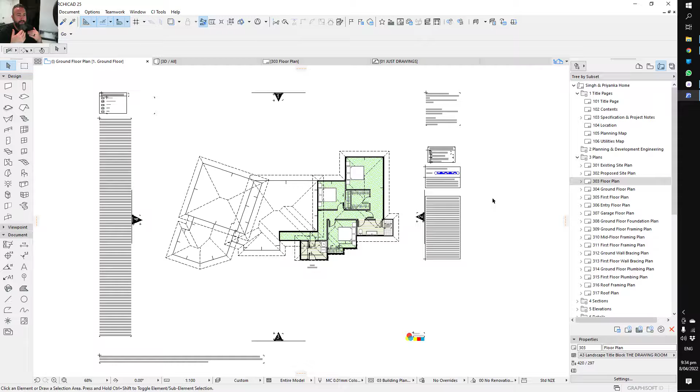So this is where we're at. Here's the site, I've pulled the garage right forward. Now it's not a 3 metre setback up there, it's 1.5, because that's a privately owned right of way. So 7 Lily Way is a privately owned right of way, so we can go 1.5. We can also push that back 1.5, or even 3 meters if we wanted to. There'd be no issue there.

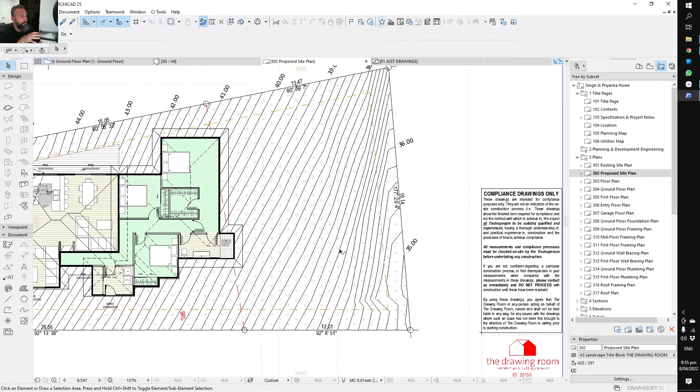And here, because we're on a timber floor now, I'll show you why I've done that in a minute, we're running through over the BRL, but of course we've got the cantilever for the timber floor, so we're not going to have any piles on the other side of the BRL. Even if we did have piles on the other side, I happen to know that this here is actually pretty good ground, because of plots I've done up here, so it's not really an issue.

Alright, so first of all, meterage. You'll notice the square meterage, I'm at 205.05, and the original was 205.5.

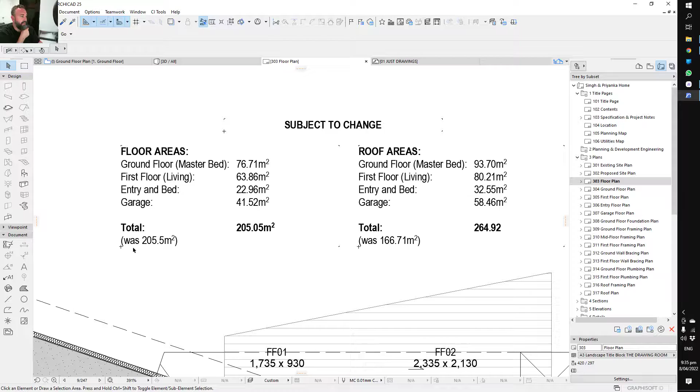All of the areas and spaces, all the key spaces, the living spaces, the bedrooms and all that kind of stuff are the same or very similar to what was in Steve's plans, so the customer shouldn't have any feeling like they're losing anything. They should feel like everything is the same.

That's my plan. I intend to make this 205.5, so I'll find that 0.45 square meters as I go along and develop it a little bit more. You'll see the extra development I need to do later on.

I also haven't put any staircases in at this point, just in case we need to make changes. A staircase takes 20 minutes to half an hour to do properly, and because there's 3 of them in here, that's an hour to an hour and a half worth of work. Then if someone says I want to change that, I don't want to have to redo it, so that's why that's not in there at this point.

So the idea is the garage is at the top at 47 meters above sea level, and then you come in there. To get out of the garage you'll go down a garage door. You can't see it because I've got it on the wrong layer, but out of a garage door here, down here, and there's a landing here. Then below there, about 600 mils lower, is the entrance. So you'll come in here to the entrance, bedroom, bathroom, and then down these steps.

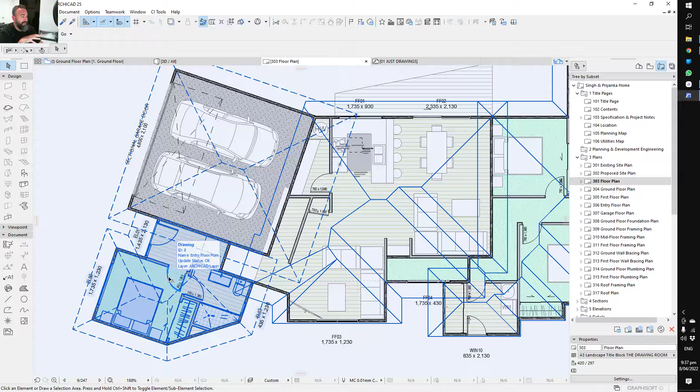Now I wasn't sure about this bathroom, whether or not we want the door coming off there, I can do that, just let me know, or off there as an ensuite. I actually thought it looked really nice as an ensuite, and I figure they're probably going to put their parents in there. I'm assuming when the parents come from India, that's where they're going to go, but you guys know the customers, so I'll leave that to you to discuss with them.

So down the staircase, family room. The family room was downstairs in here, I've moved it up to here, and I think that fills that space really nicely. Obviously there'll be stairs there and stairs there, so you'll just have to imagine those for now. Pantry, hot water cylinder, kitchen, dining, living area.

Down the stairs down here, this drops about 1 meter, I think, from memory, between this floor level and this floor level. Then you've got your laundry, so that's probably the one main change I've made, they've got a separate laundry now that wasn't there. And then you come around, and obviously you've got your 2 kids' bedrooms and your master bedroom with your Dutch ensuite and a big walk-in wardrobe.

So the roof area has gone from 166, Shane, from 166 square meters to 264 square meters. There's not a whole lot I can do about that, but I believe I've saved you quite a bit of money in the foundations, so hopefully it all works itself out for you.

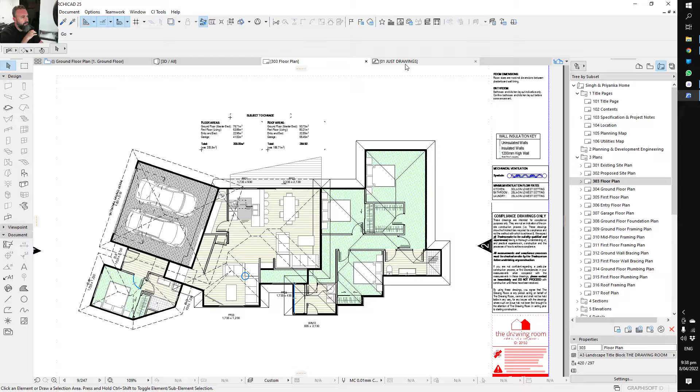When you have a look at the site plan, you'll see how stretched out the house is, and I'll show you in a minute how tight it is on the daylighting. So you can just see there was no way that other house was going to fit on here, it's just physically impossible, which you already know.

And so we've basically just pulled it all out and separated it out into 4 separate layers. Now it was 5 layers.

I had this master lower again, pulled back, with the deck wrapping around there, because I wanted them to be able to look out and across there, but it just doesn't seem really practical. I could do that, but I'd have to reduce the square meterage, which isn't what we want. Going back to them and saying your house is the same price but smaller would be a pretty hard sell.

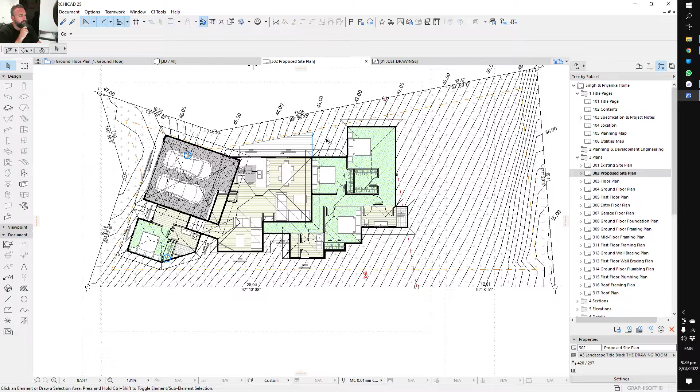So I have to have 12 square meters of outdoor decking area. The rest of that 50 can be in here, that's no problem. I still have to play around with it a little, but it's about 12 square meters there. As far as the exterior goes, don't pay attention to the roofs.

They're only there at this point to give me reference points. What you see in the silver is not actually a roof, it's where the top of your truss will be. On top of that you still have purlins and roofing iron, and on the edges you still have your barges and gutters to go on. So there'll be more added onto that.

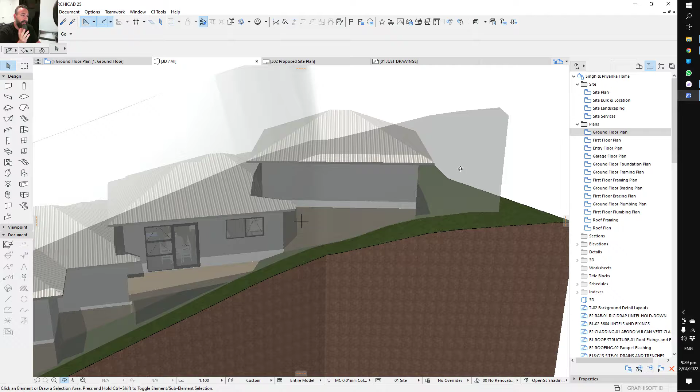Now in Tauranga City, Mark, you might be interested in this. We've got 55 degrees on your north face and 45 degrees on every other face, and nothing on this face. So technically you can't penetrate it with your barges or eaves, but you also aren't governed by any daylighting, which isn't an issue on this site.

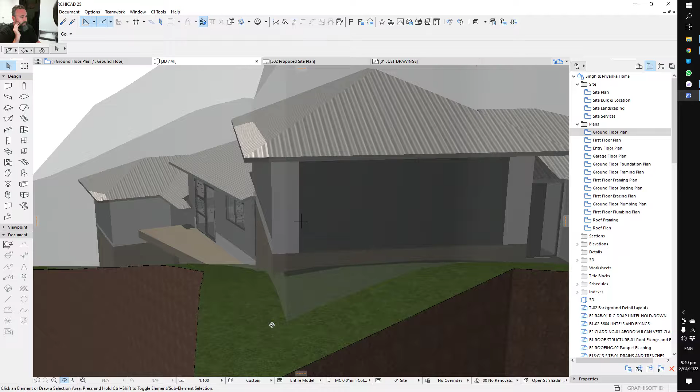In Tauranga City, and it's the only council that does this in the whole country, you're allowed to put your eaves into your setbacks. Most councils get around that by having lesser setbacks, like Auckland for urban areas is 1 meter, but you can't put your gutters or barges into that. Whereas Tauranga City say you can build up to 1.5 to the cladding, and your eaves are allowed to go inside that. It's actually to the gutter, not the eave, so we still have to be pushed back a little, but you can intersect that.

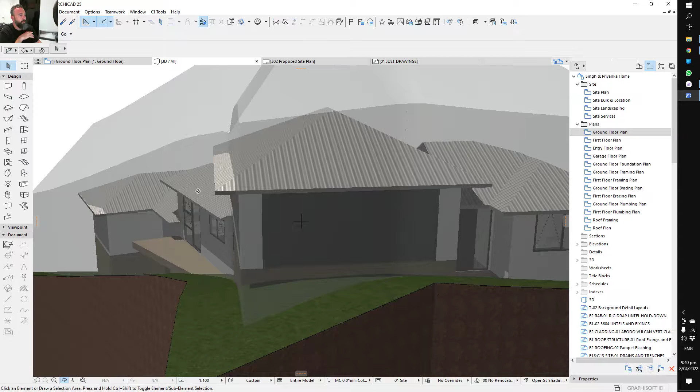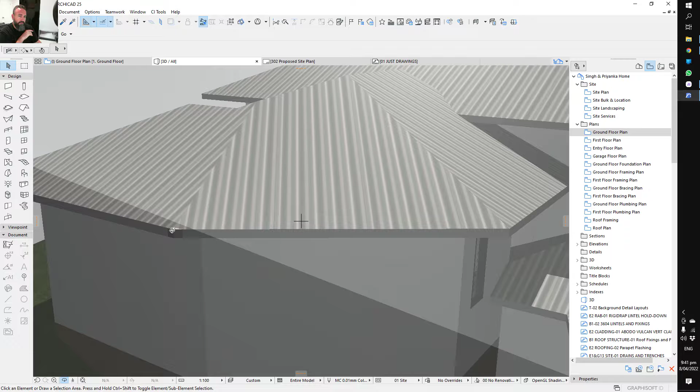What you can't do, which trips a lot of people up, is have this eave - see this line here, because it goes up 2.7 and in 45 you can't have it in there. You can only have it on that side. So that will trip you up. You'll see here it's there, so it's fine. If it was only 150 mils up, you couldn't do it.

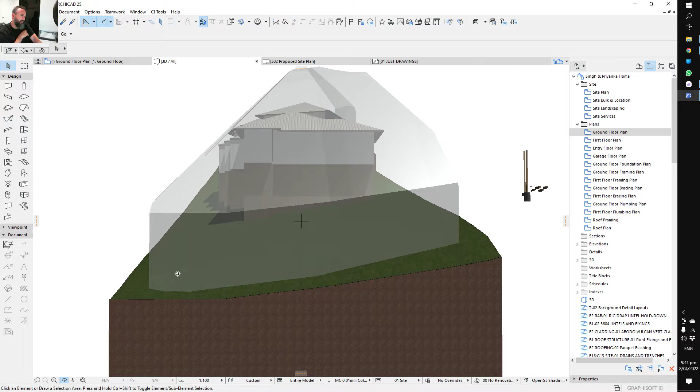And that's obviously when we get down to this area here, it becomes a major issue because these poke through really quickly as you go up the slope. The slope's really difficult, as you're already aware, because not only is this the 55 degrees and this the 45, so this is your slackened slope. The site falls from high to low over here, so it's dramatically increased that issue.

Again, you can see it on the foundation there. So this side drops much steeper than this side does. If you're wondering how tight I am, you can see there how close those are to that line there.

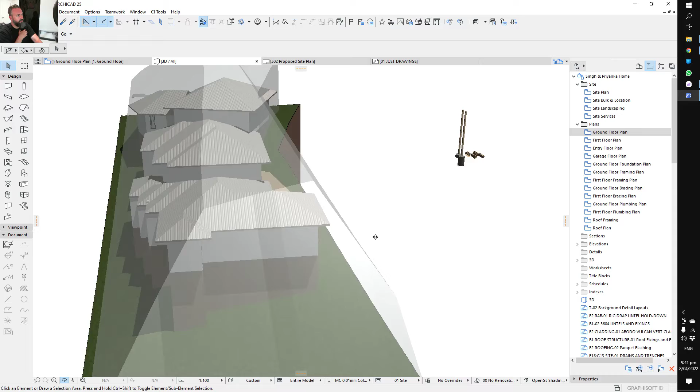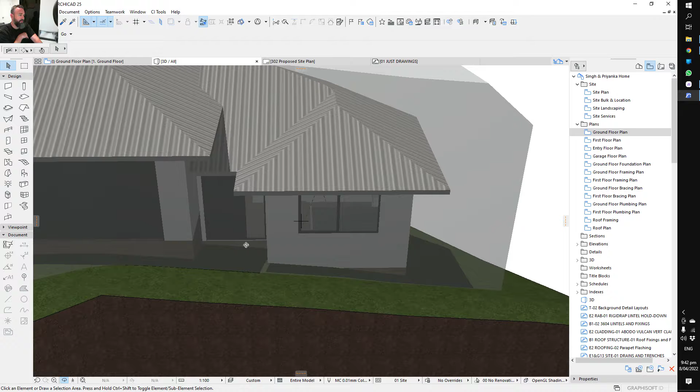Alright, so the idea is that we don't have any more blocks - no block foundations. We'll do a timber garage floor, timber floor for every other foundation. We'll have a deck, a vehicle deck, not a walking deck, coming through here. We may need to, if we can scrape out, we'll just scrape out of here. If we do need a small retaining wall, we'll pop a little timber retaining wall through here with some steps going down to a deck in this area to go through that front door.

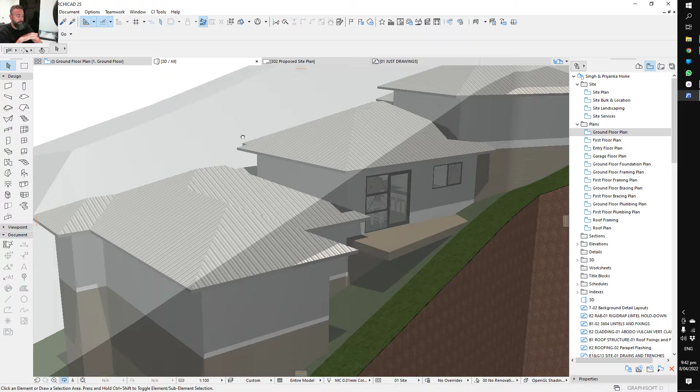We will shoot this roof line down - these roof lines are all going to get played with. Shoot this roof line down so it intersects with this roof and then comes through to here. And then I want to see if I can totally adjust this roof so that we can put a nice big window in here somewhere, if it's possible. It may not be possible to get a really good view out in this direction, because that's, I would say, the direction they want to be looking in.

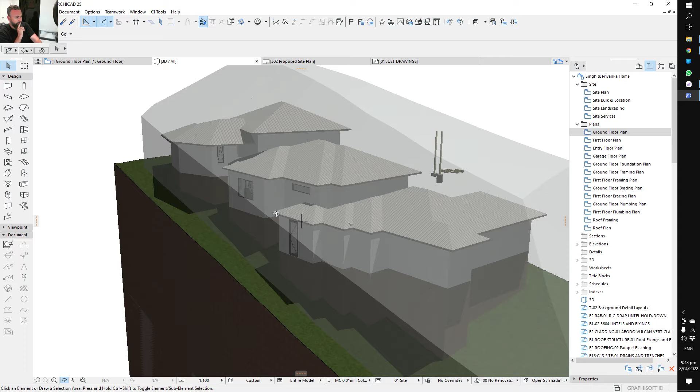My issue at the moment, which I'm going to resolve first, is this gutter height versus the stormwater inlet. Obviously I need this gutter to be higher than there. I've left it here for now because it's the tightest I can get on the daylighting, and also I wanted to try and get some space in here for some windows. But obviously I need that gutter to be 300 millimeters above the inlet of that stormwater pipe, by law. So I'm just going to have to work on that, and I will let you know how I get on.

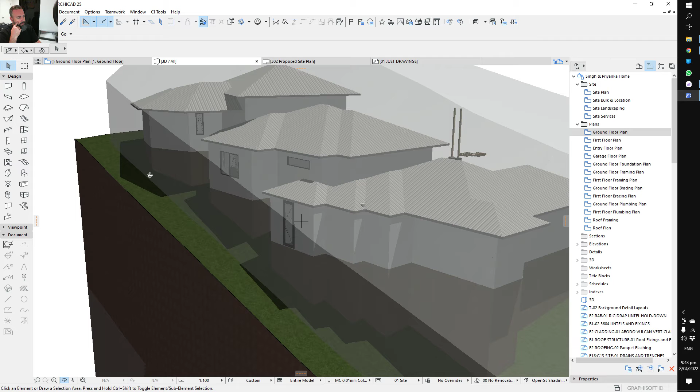I can use bubble up chambers and other things, but they obviously want to avoid that. And you're already aware, I'm guessing from Nick's job, Shane, that all these sites, unless you do a really basic design, anything two-story requires a septic pump. So we'll put the pump in down the bottom here and just pump the septic straight back up again.